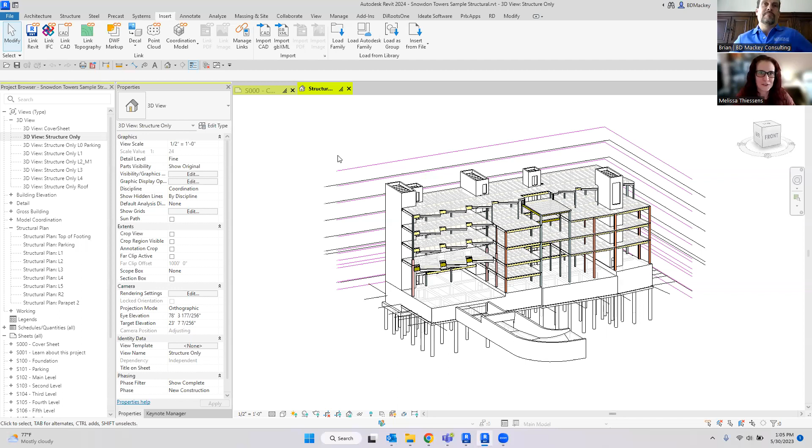And then I realized a big gust of wind came up and it was all the pollen. I'm like, oh no, wait, that's yellow, not white. That's just pollen blowing and it literally just covered the car as we drove through it. I'm like, glad I don't have these. I'm feeling like I'm going to use all of my N95s just to go get the mail and go outside because it's so bad. Yay.

Tom was asking why some of your levels are purple. And I did see that.

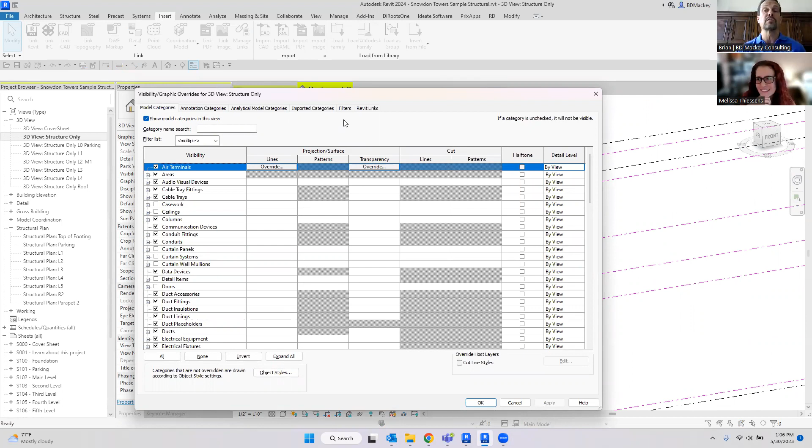So for me, if I go into the visibility graphics, and I do this often in the structural side of things, or even in the architectural side of things for the structural links, I basically start using filters for this stuff. So this particular filter is going to be the ones that says levels. I have levels that are building levels and levels that are structural levels.

So if I really wanted to go change the structural levels to be something else like green, we could add that in here too, so we can have pink and green. That's looking at the properties of those levels. So for me as the structural engineer, see, and I forgot to pull this one out wide, I should have done that earlier, and I would realize I was a slack ass.

But in the properties of a level, you do have: is this a building story or is this structural? Honest truth, I really do not know how Revit uses these behind the scenes. I use them quite often for filtering purposes or for scheduling purposes or things like that.

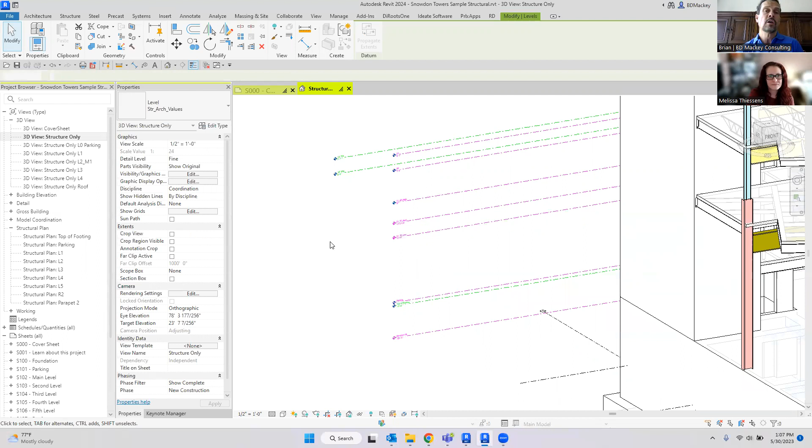So for me, when the architect says, hey, here's my level one, here's my level two, here's my level three, that's cool. But often for me, and this is kind of rotated weird with those being long, what you can actually see is there's the level that the architect put in there. Then I have my top of steel level.

And I know some firms love this idea. Other firms can't stand this idea. I know Desiree and she hates this idea. She just does the architect's level and puts offsets in. So whatever you're going to do, that's fine. But for me, I like a level in here. So I added this level. So therefore, all the steel can be at that L2 TOS rather than the architect's level.

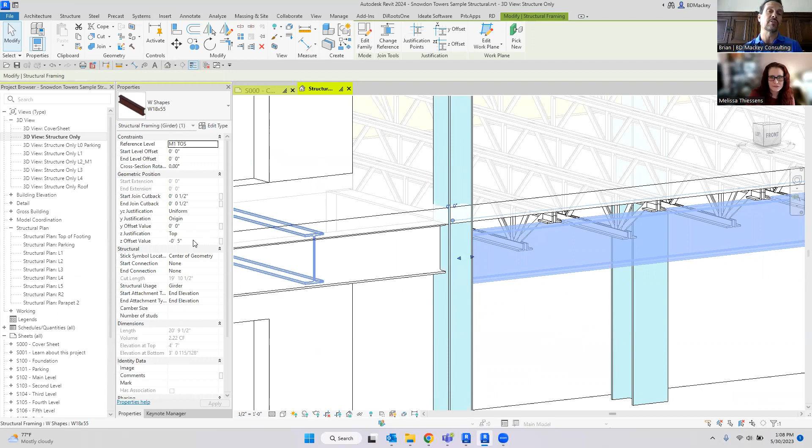Because especially on something like this beam, I don't want to have to take into consideration the thickness of the slab as well as the thickness of the joist to then move this down. I just know I've got a joist in here that's got a 5-inch seat depth. I want to put that 5-inch value in there. I don't have to say, oh, it's a 5-inch seat depth, and then there's a 5-inch or 6-inch or whatever thick slab, so I need to move this stuff all down.

So my floors are always set up to the building story, and my steel is always set up to the top of steel. That's how I model it structurally. I sometimes do the same thing in architectural files as well, especially when people start adding mezzanine levels or parapet levels or things like that.

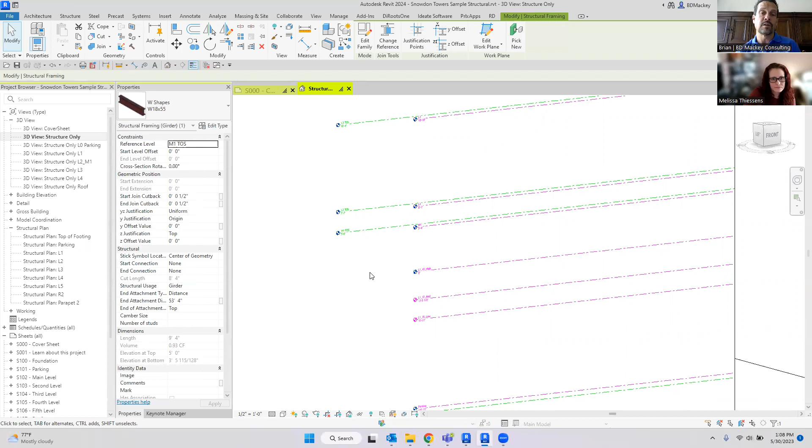I will go in and start unchecking that it's a building story. So again, I can start filtering out the parapet levels or any other crazy level that the team thinks they need in there. So that's why there are some magenta, purple, pink, whatever you want to call them, levels, and that's why the other ones are black. And if anybody truly knows why you have building story and structural, I've never actually seen how this affects anything else before.

But I'm going to add something on this. This is going to be more for the architects and the structural engineers.

The other thing about levels that I see that's often overlooked, and if you guys can't tell, I'm buying time for you guys to submit more questions. So this is me buying time.

But when you look at a level, there is a value for a level called computational height. And what that actually means is when we are taking rooms and/or spaces and calculating the square footage of that room or space, at what height do we do this? Normally, this isn't going to really affect you unless you start getting into canted walls.

So if I've got walls that are canting and I go in and start changing this computational height, it will go through and start changing where it's being calculated from. My personal opinion, leaving this at 0 is a horrible idea. And the reason why I say this for architects is if anybody comes in and models like a finished floor or a ceiling as a floor or something that's at that 0 height level, and you have room bounding checked for that element, it could really start to screw up all of your rooms.

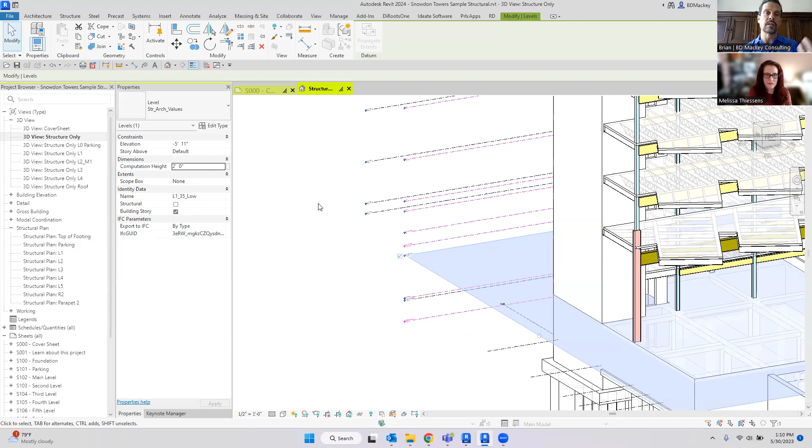So for the architects or even the MEP engineers in the room, I almost never have my computational height at 0. I go ahead and move it up to like 2 feet or something. Because if I do that, then it's going to calculate the value at 2 feet, not if I put a finished floor and worry about it there. Again, if you're in an all plumb building with walls, then this really isn't going to affect anything except for possibly keeping you okay with not screwing up your floor plan or your room spaces, etc.

So I'm going to go into a floor plan, just as an example as I'm still buying time for more questions, and I'm going to throw a section in here. I'm going to go to that view. Oh, actually, I forgot to put a room in there first. I'm going to come in here and place a room. No, I don't need a room tag.

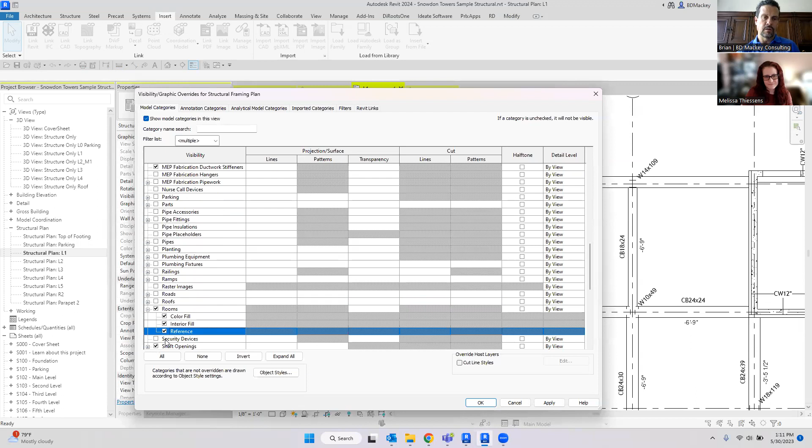Oh, sure, I'll go manage my view template and just turn rooms on in here because I forgot I had these turned off for the linked files. Probably should have gone to a working view, but that's okay. I'm going to turn my rooms on, and turn on the X and the color fill. Okay. I'm going to put my room in here. All right, so these other rooms you're seeing are the rooms from the link file, but I've now got a room in here and I've got this section.

The one thing that I'll also point out is if I come in here and select this room, I did this one at level 1, that's where its base is. So I'm going to change the computational height to 4 feet on this. I'm going to go back and select that room. Do you see this dashed line that appears when that room is selected? That dashed line is a virtual representation of that calculation point. So if I select it right now, you can see it's about 4 feet above the ground. If I go back and select my level and change that down to 2 feet, then reselect my room, you'll see that it has now moved down.

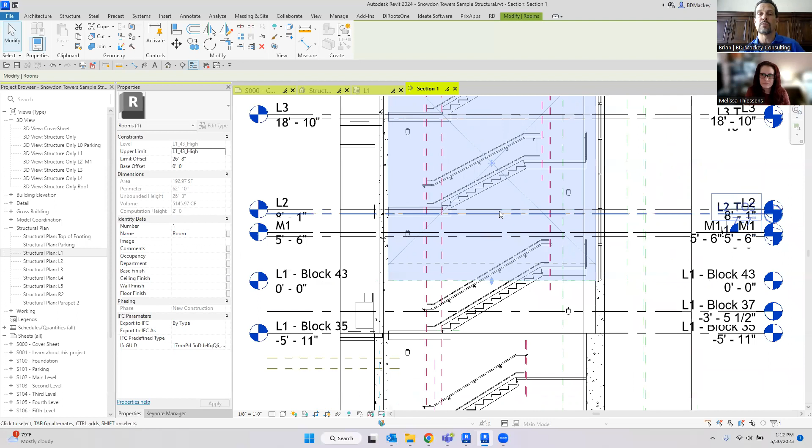So if you ever select a room and notice there's a dashed line and think, what is this? I can't select it. What was that line there? That is the computational height. So if you are in a section or an elevation and you select a room, you can easily see, according to the level you're on, what that computational height is set to. So that's one of those big things I always like to point out for the architects and engineers in the room. Change that computational height for the levels from 0 to at least 1 foot or something like that.

Cool. Nick also made a comment back when I was talking about the top of steel levels: if your slab thickness changes and you're like, oh man, I went from a 5-inch thick slab to a 10-inch thick slab, that's a bit exaggerated, you can just move the TOS levels down. Yeah, that is the other reason why I do it. So if my slab thickness changes, I don't have to go grab the properties of all of my members and add 6 inches or 4 inches or whatever that value is. I just move the TOS level down with it. So, yep. Thanks for bringing that up, Nick. That's the other reason why I do it. I just forgot to mention it.

Do you ever tie that to a global parameter?

The height of the level or the computational height? Well, either, I guess. Height of the level you can't add to a global parameter, unfortunately, without using dimensions. You could tie them all in with dimensions, and I have done that before. So on a typical high rise, I might do a dimension from one level to the next level. And then in that dimension, I can add a global parameter for typical floor to floor height. And then if I change that, they all move.

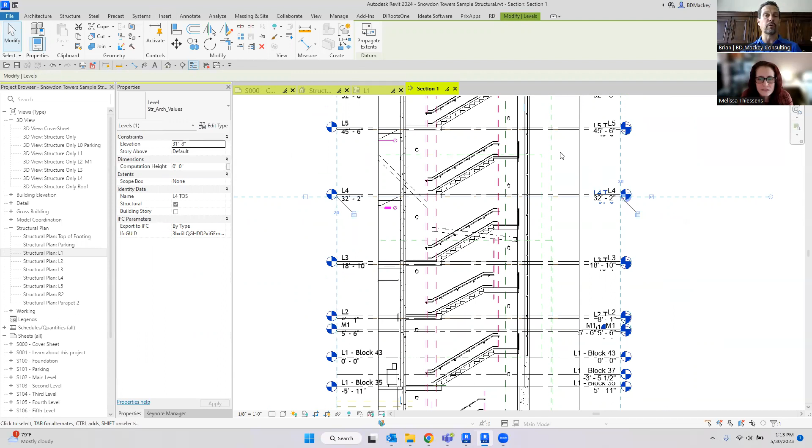Sounds really cool. And on sample projects that are pretty small and simple, it works great. On a real project, you do that, then it takes 4 hours because everything's blowing up and you move a level anyway. So personally, I prefer to move the levels one at a time to start seeing, oh, hey, this blew up these few things. So that kind of gets into that. But that was my add in to the levels from whoever originally asked it.

I think it was Rick. It was all about color. I like it. All about color.

One thing I was noticing though, if you pick a level again, under the constraints, there's the story above. Yep. Does that go into things that are building story? So if you have level 1 and level 2, but you have like 6 levels in between, does that only show your building stories? Correct. Yeah, the story above only shows building stories. So you'll see in here, I'm not seeing any of the ones that say TOS.

And then I believe the story above is the next logical story above that it takes into consideration. I remember I dug deep into this, like, okay, cool, I have a story above, but what does that mean to me? And then I can't remember what my solution was. Sure. Well, that was my questioning way of answering. That's one thing that Revit does with the building story. Okay, great. Then what does story above give you? I would love to think that would also work.

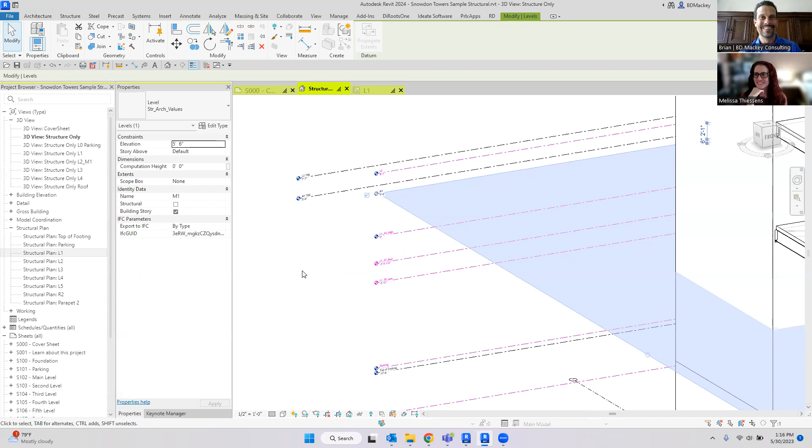Yeah, the pop-up said something about IFC, which we all definitely use a lot here. Oh, well, that makes sense. I was gonna say it might have been used in exporting out to the old analytical models for engineers too, but I'm not really sure. Yeah, so there you go. If you're non-American, you might be using that because everybody but America uses IFC. Right. So maybe non-Americans could tell me more.

Cool. So I see some other questions in there. Let's see, we'll stick with the structural bit. So Ben's asking, when working with wood projects, is it better to structurally model the architectural walls that we need as shear or bearing walls, or just use their walls and use text to label them? There's actually two ways you can do this. You can model the shear wall.

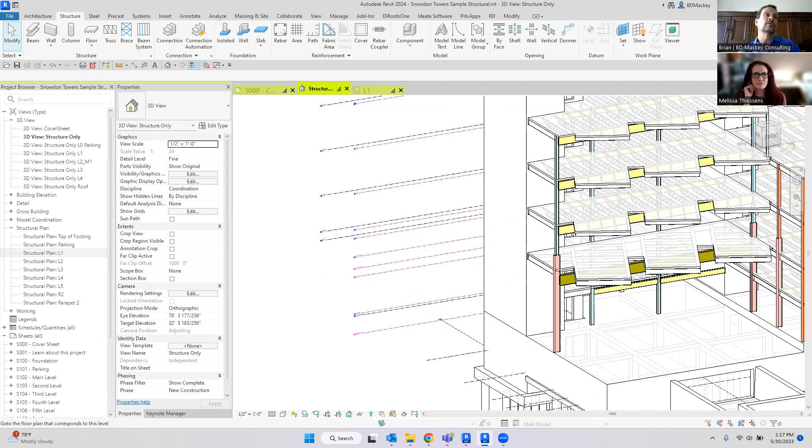So I'm gonna go back here. I think level 1 doesn't have architecture on, except for the rooms. So I'm gonna go back to my level 2, which should have the architectural stuff turned on. So when you come in here and you start looking at those links through the architectural file, let me find an actual wall.

If you wanted to get this coming in here and you wanted to model the architect's walls, one thing that you can do is you can model right over the top, like you said, so you can label and tag them the way you want. This is another thing, and it depends on the size of the project, that you can do.

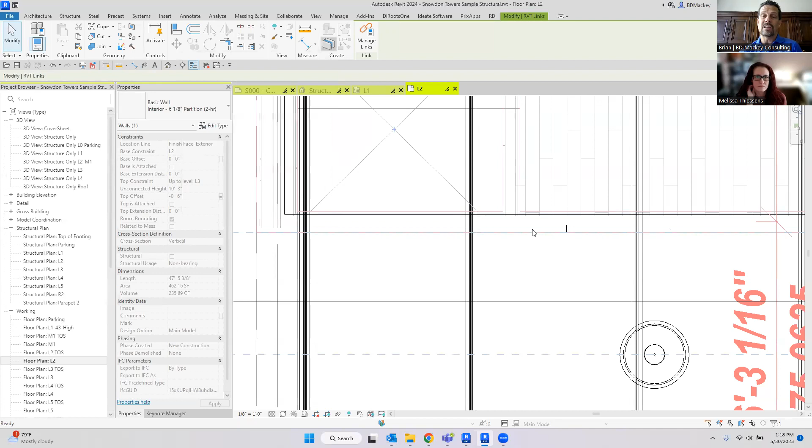But you'll notice that if I tab select and get the architectural wall, what I can actually do is come in here and start creating parts. So I can take that architectural wall and generate parts for it. So now I have every single layer of that architectural wall put inside of here. So if you're like this wall shear, that wall shear, that wall shear, and I'm just going to go ahead and isolate these real quick, but not the architectural file.

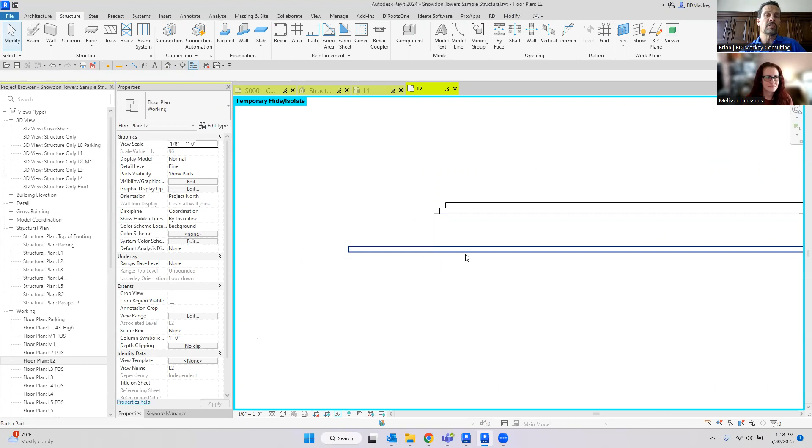But so you can see I've now generated parts from the architectural wall. And the cool part about this is, and I grabbed one that had a door in it. So you'll see that even though I grabbed this part, it automatically picked up on the opening from the architect's where the architect had the door. It didn't put the door in for me. It didn't put my opening in there if you want the opening family, but it did go ahead and break this down as a single wall.

And if the architect moves their door, of course, it'll move the opening. If they delete the door and put a new one in, you're screwed. Then all of a sudden, actually, no, as a part, it would still pick up on that. So that's the other nice thing about parts.

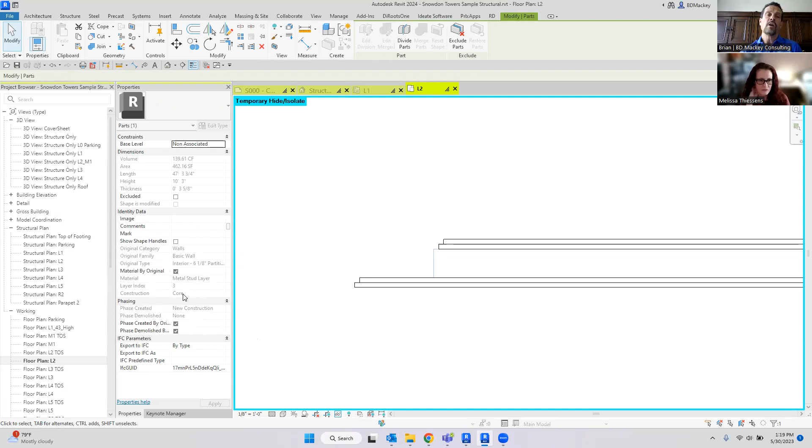But if you really just wanted to start showing like the stud layer, or you want to show this layer, notice that once I've done this, this is all in the properties and picked up, said, hey, this originally came from a wall. Its family was a basic wall, and it came from this original wall type. And it's even got the material by original. It's got a metal stud layer, and it knows that this was the core construction, right? All of the properties of the wall still come across here.

So if you're like, man, I wanted to pull their stuff out, but I only need to see the core, then what you can also do is go into a filter, and I'm going to go filter out parts. I'm going to go say create a new filter. Parts, non-core. And you will notice that I did select the part before I went up to the filter. And the only reason why I do that is then when I hit new filter, it automatically selects the category for me. So just an FYI, that's what I always do for filters. Plus, that way I can then see the properties and remember what I'm trying to do for my rules in my filter because I always forget.

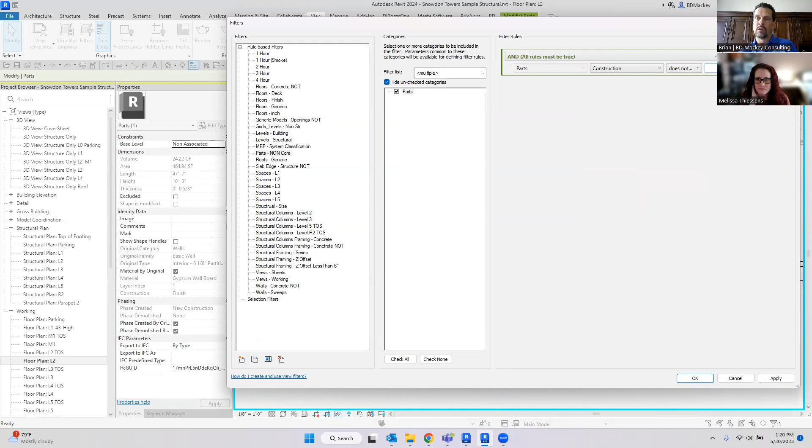So now you can see it's got parts. So I've got parts selected. I can say parts. And what you can see in here is now you can start seeing all of the original stuff that's inside of here. The original type, the original family, the original category. And I should be able to inside of here see what was the construction, right? So the construction does not equal finish. And I can say, okay, all right?

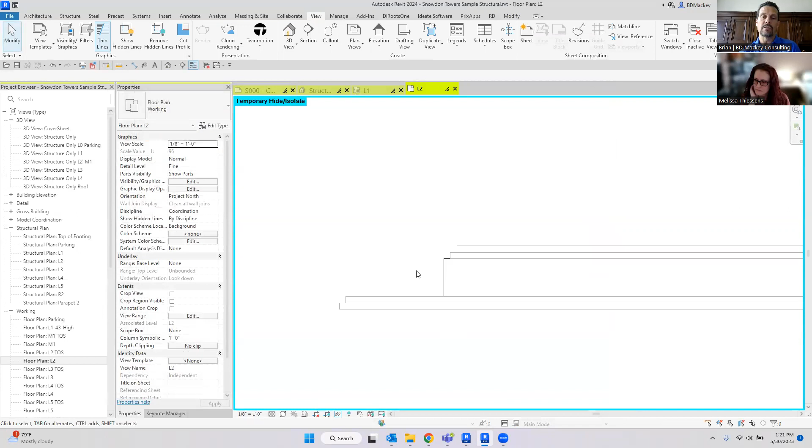So then in my view, I can go back and add that parts filter, and you can break it down to finish 1, finish 2, all the different things that you're looking for. And now I can turn those off, or I'm just gonna halftone those just so we can still see what's going on. And now you can see I've got my core layer, but not all of the rest of the other parts inside of there, right? I'm going to even go in and maybe not just make those invisible. I'm going to go ahead and change the line weight to a thinner line weight.

Which did not work. So I'm just gonna ask a question on your filter. Is there a reason you set up your rule to say does not equal? Because normally for a structural engineer, they're going to want to see the core stuff, not the finishes.

Right, but when you part an architectural wall, you're going to get all of the finishes. So instead of doesn't equal finish, would you say equals core? Well, yeah, but it could be finish, it could be substrate. Equals core. Yeah, I mean, I could have left substrate too, but I don't know.

Honest truth, in Revit prior to 2023, when people were like, I only want to see the core layers of the walls. If you guys did not know that, in 23, under your walls, they added the category for non-core layers. So in 23, you can turn off the non-core layers only to see the core.

But prior to Revit 23, what I would actually start showing people is, hey, let's go ahead and part it. Now you can see just this. That's a pain because you've literally got to select every single wall and part it. But if you do that and you have a view set up only to show the parts, not the original, then you can go through and do it.

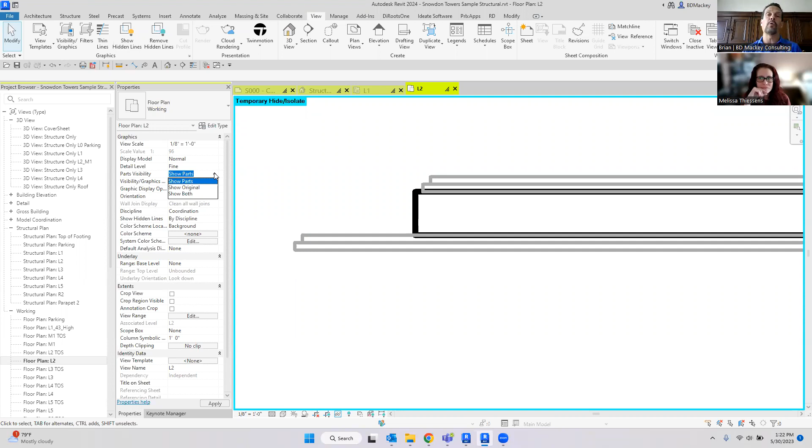So for the structural engineers, like, man, I only need 3 or 4 of the architect's walls that are going to be my shear walls. Now you can do this. Now you're only seeing those parts that you're just determining as shear. You can still come in here and add marks or comments to this. So if you needed to add additional information, you could go ahead and do that as well.

Downside to parts is if you part a floor or a ceiling or a foundation or a column, everything in Revit that's been parted is a part. So they are all going to have the exact same line weight. I added a filter for this one, but you can see the original filter, it's not there. If I go part the floor, it's going to have the same line weight. It's going to abide by the same rules as all of the other parts.

So if you're really getting into parts, you've got to go start creating a crap ton of filters for all the different options for a part to change the line weights or to turn the visibility on or off individually.

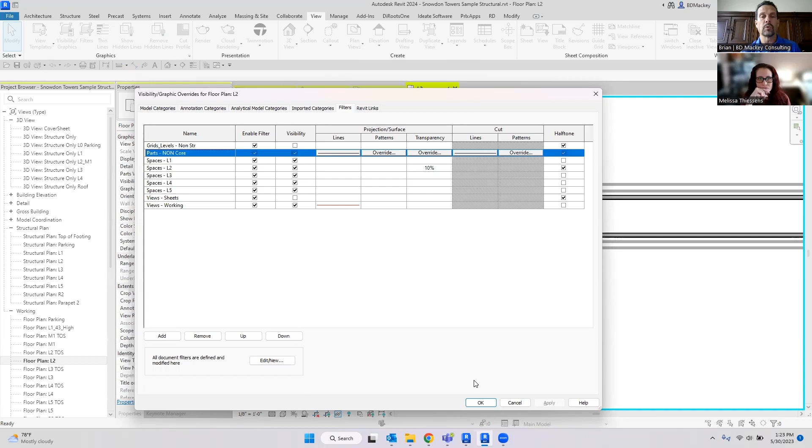The other fun part is now that I've parted this, I can actually get rid of the material by original. So maybe you've got a wall shear material for shear walls, whatever. I'm going to come in here and switch it to that material. And now I have this one representing whatever that material is. So if you have a hatch pattern in that material, you could swap it out to be your material.

Again, it gets to be a little bit of a pain if you've got hundreds of these walls, but this is what I tell a lot of my structural engineers to do on wood multifamily or wood residential. Just part out the architect's walls and be done with it.

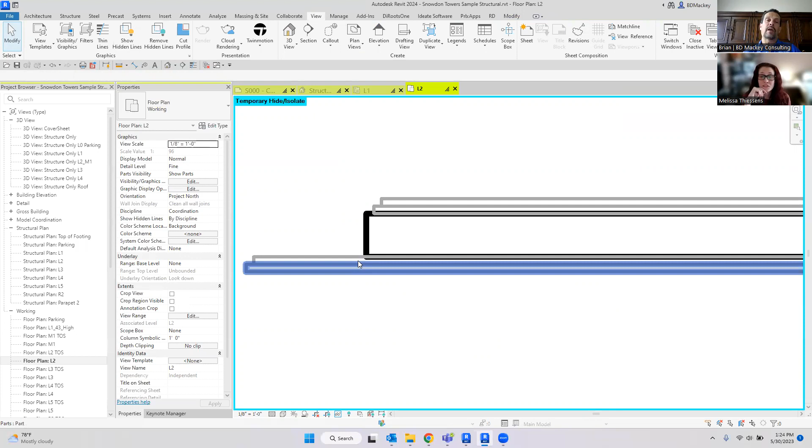So does it basically copy monitor their wall? In my mind, it's better than a copy monitor because now I have the capability to turn things on and off and it still maintains the origin and it just updates. I don't get the stupid coordination monitor alert, blah, blah, blah. It just does it. That is better.

If I'm working in a project that's going to be precast or tilt-up and the architect is modeling concrete, Desiree actually did an entire project like this when parts first came out, probably back in 2016, on a small building. She selected every single one of the architect's walls and said create parts. They were all concrete. She used a filter to turn off everything that wasn't part of the core. And then if they moved the door, it all updated.

I've now got this part. Let me go back to 3D here. I'm going to select the parts first and go to my 3D. So she even went in and started editing the parts. You can actually merge and unmerge parts. So she started doing some of that stuff. I'm going to go to sunglasses and isolate. Oops, that's not sunglasses. It's previous.

Isolate elements. Come up here to say, do part visibility, just show me parts. Right, so she even came in, then all those parts were there. She's like, ooh, I need to grab this part. I need to divide that part because then I needed to put a concrete seam here. So she edited the sketch and she's like, cool, let me put a seam right there and then finish.

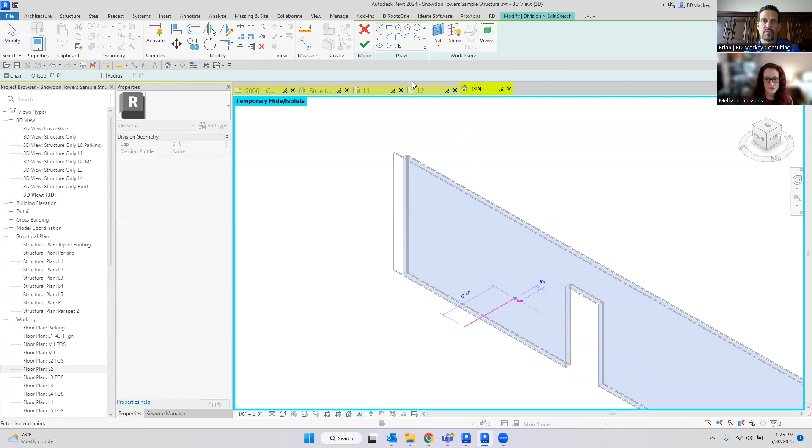And then she was able to, nothing will be divided. I broke something there, but she was able to go through and then start playing with all the different parts in the divisions to break it up into the pieces she would need for precast. And again, when the architect moved the door, it all just kind of updated and it worked pretty well. Not a huge project, again, more of a smaller type project.

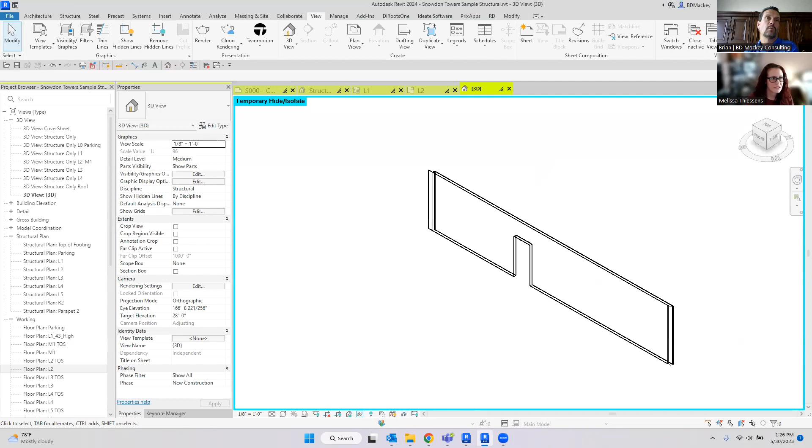So hopefully that kind of answers the question of wood projects. The other thing that I have done too is I've actually created an adaptive component for one of my clients. Like, I don't want to go through any of that headache. That all seems a pain, copy monitor this. I just basically need a tag that says this wall is shear. So we actually created an adaptive component that had like a nested tag into it.

So we would click this endpoint of the architect's wall, click this endpoint of the architect's wall, and it was just an adaptive component with symbolic lines on it that would move with it. And so if they moved the wall or whatever, it would go, and then they just had manual values they would type in for what type of shear wall it was. So they weren't actually doing any modeling. They were just adaptive componenting with symbols to go through that architect's file, and boom, there they go.

I've seen other people do it with just like a line-based detail component. So they just draw a line next to the wall. It's got values that they can type in. It looks like a tag, and they go through and do that as well. So there's a few different options. I'm personally a fan of, I like to model it. So I would either do parts or truly just go model a wall. So Ben, hopefully that answers the question.

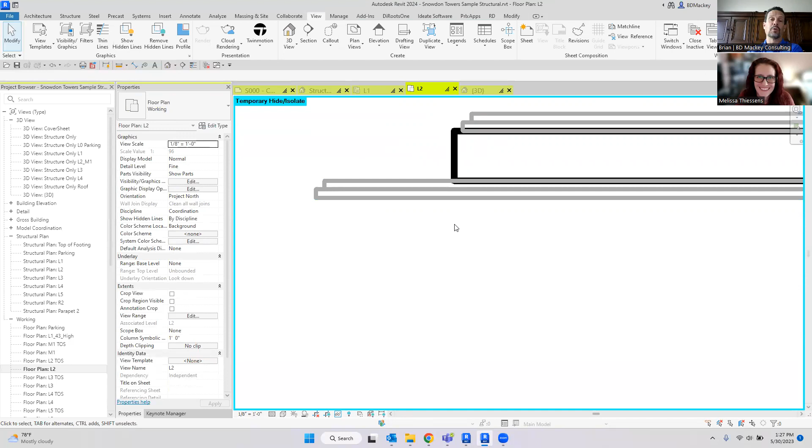Say, I didn't know that if you did parts on that, that it would keep updating. That's kind of awesome. Yeah, the parts through links are actually kind of cool. I had one client, I would show you the project, but I can't because it was a government project, which is so stupid. It's a top secret project that you can see off the road, but it was the new air traffic control tower for the Pentagon, which is a fire station / air traffic control tower.

But it had all these bumps in and out to the concrete. It was all different thicknesses. It was all going to be cast in place or precast, I can't remember. And so literally the architect themselves just kept doing the parts. Because the other thing about it is you can take the part, you can divide it, but you can also say, show me the shape handles. And so he was dividing parts and doing shape handles, like, oh, this one part needs to be thicker, and over here it needs to be thinner. So he was going through, like, cool, let me do that.

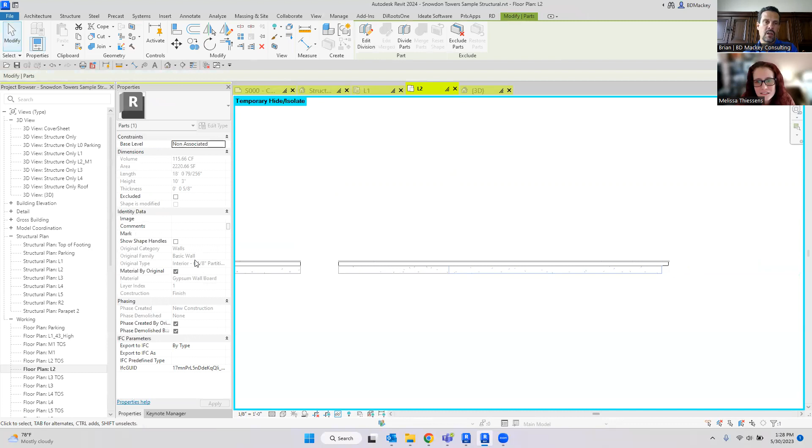And let me divide this part. And let me go edit the sketch. And let me draw a line from here to here. And let me finish that. And now he's got that division, right? So we finished that division. Then you take this one and be like, okay, let me show the shape handles on this one. And then this one was thinner.

And so literally just with one wall, he did all of this, and he just made sure all of his views were just set to show parts, except for a couple working views when he manipulated the walls. And so that's what he went through and did on the entire project. And then even places where, oh, there was an opening here and we needed to merge it. He split this part here and then merged these two parts so the concrete would wrap around the studs or the insulation or whatever it was.

And his entire building was done with parts. Small project, only 1 or 2 guys working on it. It was beautiful to work with. Large project, large team, yeah, you're going to get somebody who doesn't understand parts and you're going to be hosed.

So. Trying to think of a more family-friendly way to say I want to play with parts more. Melissa, do you want to play with my parts, Melissa? Is that what you're trying to say? No, I want to play with my parts. Wow.

Hey, whatever. Once you get done playing with parts, make sure you publish the package so someone else can consume your package. Someone can consume it. Yeah.

Oh, I love Autodesk and the way they don't think things through. And make sure to wash your hands afterward. Nice, Rick.

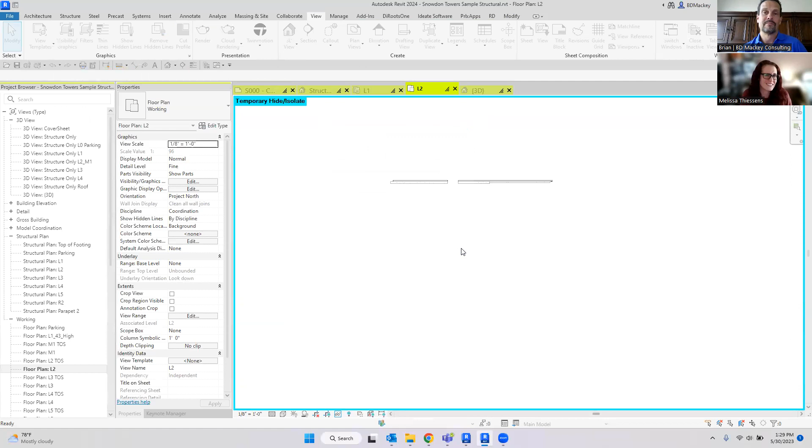All right, so what other questions do we have? Well, I feel like that kind of dovetails into Simon asking if you know any undocumented features in Revit that everyone should know. So maybe they did document it and I didn't look into the parts documentation because you don't want to Google that.

How do I play with my parts? I don't know. Let's Google that one right now. The best use for your part, yeah. No.

The biggest undocumented feature that I show, and I laugh because I was at a BILT session, I think it was back when it was still RTC, and I was giving a presentation. It'd been a while since I'd been in my data set, and I'm like, crap, wait, what did I dimension here? So I right-clicked on the padlock, and I do this all the time, and I hit Show Related. I'm like, okay, it's dimensioning between grid D and grid C, right?

I don't remember what it was. It was in a family or something. And I'm like, okay, close it. I just did that real quick for an explanation. And somebody's like, whoa, hold on, back up. What did you just do? And I showed that, and everybody's like, oh my God. I got like 75 tweets for that little tip. Nothing about my entire session.

So as those of you who know me well know, when I'm in a boring meeting, I will right click on everything. And in Revit, there's a lot of things where you can right click and get a toggle. Cool, I can toggle it by clicking it; the right click is stupid on that. But if you right click on this padlock below a dimension, you can say Show Related. And when you do that, it's going to open up this little dialog. It is a non-stretchable dialog box.

I've been yelling at Autodesk for years, but they're like, yeah, nobody uses that tool but you, Brian. I'm pretty sure on the little list of tools being used on the reports they get, I'm the only person who uses this. But it will then show you the two elements. It'll tell you up here in the description, and it will highlight those elements down on the screen.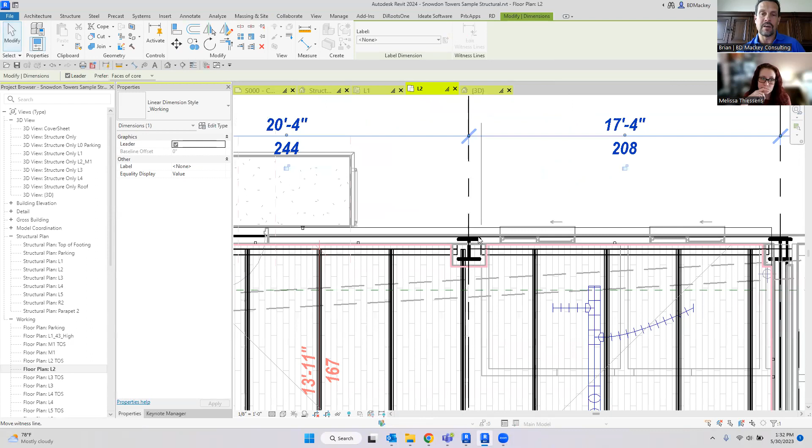Now, this is really stupid in this example, because I'm right on the grid lines. But like here, did I dimension the grid line or the column? You might not know what was dimensioned, right? If I take this up here and I go down here and get the column, you might not know. You can tell now because I've stretched it out. But if this is back where I had it, is that dimensioning the grid line or the column?

So again, right-clicking on Show Related will then say, oh, no, you did the W column something, something, something. Again, non-stretchable dialog box, and grid 8. So it will show you and highlight the things you have dimensioned. And I use this tool not only in projects, but quite often in my family environment. It's like, why isn't this family behaving? Oh, there's two reference planes on top of each other. It's grabbing the reference plane called Front, not the reference plane called Panel Front.

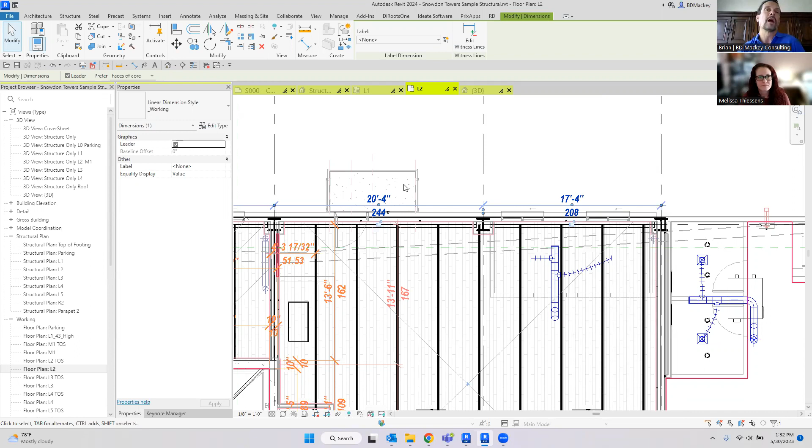And I can just toggle through those and start seeing what's going on. So that to me is an undocumented, I don't know if that's necessarily a feature, but it's definitely one of the undocumented tools that I don't think a lot of people know that you can do. So for me, it's a ton of right-clicking on whatever you do.

Another one, and I learned this, God, my kid is now 26, and I think she taught me this when she was 13.

So about 13 years ago, I learned this one, that if you have a wall or a grid, I've just done it with a grid line, and you come in here and you grab the little grip, right? I see everybody all the time, they need to get that grip, so they zoom way the heck in. And then they go try to move it, but they've also got to pan. So they're doing the claw with their finger, trying to pan and zoom and do all of this with their little finger.

If you take that grip off the screen and release it, so I'm gonna do this again, grab the grip, drag it up. Oh, it must be pinned. I'm gonna unpin it first. I'm gonna drag this grip up here, and it's dragging. If I drag it off the screen, notice how I don't have my finger on the mouse, and yet I can move the mouse and it's still going. So you can then zoom in and out. It's still trying to move that grid. You can pan, you can do whatever you want, and then you click the mouse to adjust where it's going.

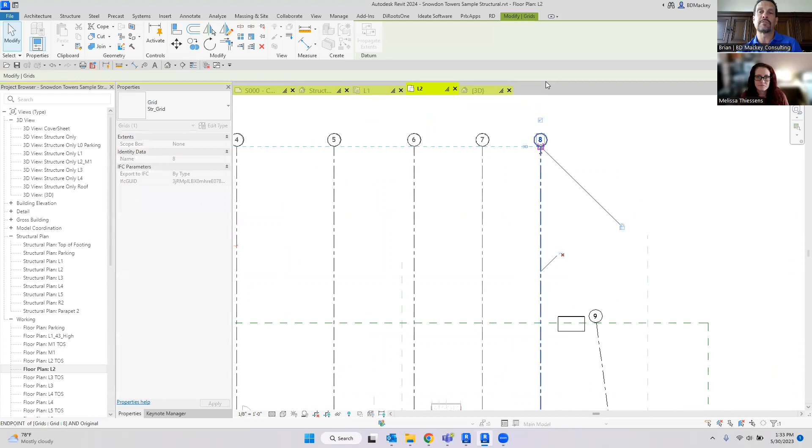So if you take any moving grip, walls, grids, levels, anything where it's line based, you've got a grip to stretch something, and you take that grip, drag it off the screen, release the button, move your mouse all around and drag it. Theoretically, you could also do the same thing by right-clicking on it and saying drag in. That will give you the same option. Handy. So yeah, I call it the non-claw maneuver.

Couple other things on the right clicks that I always like to do. If you really want to screw somebody up, you could say maximize the 3D extents on grids and levels. I don't ever recommend doing this because it does go to the 3D extents. So if you have an AutoCAD file in here that's got an actual state plane coordinate system, you maximize extents, it'll go way out to where that AutoCAD's extents are. So do be careful of the maximize extents.

But the one I do like often is the reset to 3D extents, right? Because if I turn my crop region on, and then I take that crop region and move it down here, these grids are no longer 3D. These grids are all 2D and they've been adjusted for the 2D extents, right? If I turn that crop region off and get rid of the visibility, it's still 2D and it's not reset back to its 3D extents. You can right click on it and say reset to 3D extents and it will go back.

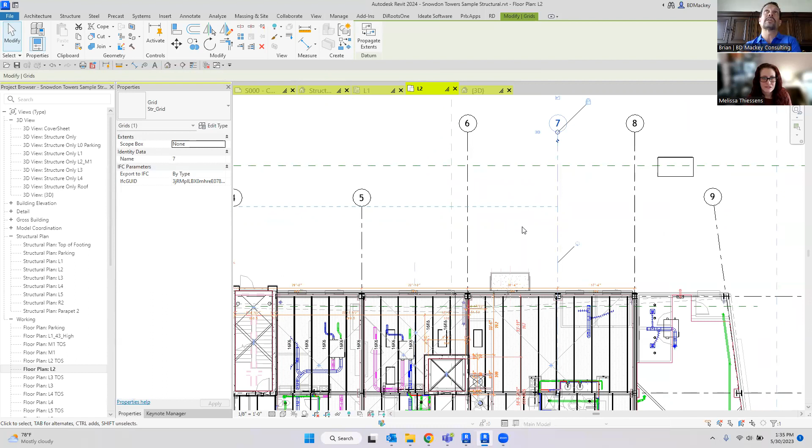Oh yeah, I only had one. I was gonna say, unfortunately, it will only let you do one at a time. So if I have two of them selected, the reset does not come up. But for whatever reason, I do not understand why Autodesk has, in most of the family templates, the levels all 2D in all the different views and half of the reference planes. So it's like they've taken the grips and moved them in half of the family templates when you go to create them. So yeah, right click, reset to 3D extents, really nice feature as well.

And I'm sure that's documented somewhere, but I've never seen people talking about that. So those are some of those little things that to me make the day-to-day productivity huge when you start going into it.

Like the other one that I don't think a lot of people know is you can say open, and in 24, or was this 23.1? I don't remember. In one of the newer versions, you can say, go open the sheet that it's on. So if you're at a view and you want to go see what it looks like on the sheet, in the project browser you can right click and say open sheet.

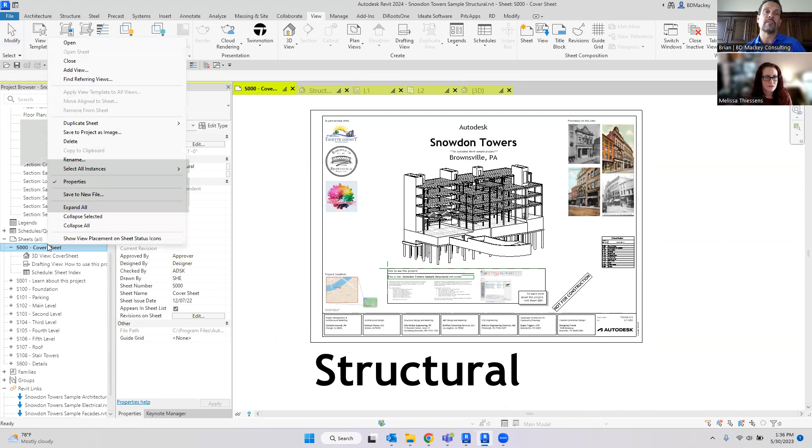Inversely, we've always been able to go down to the views you're in, or go to the sheet you're in, find the views here, and open the views this way by double clicking them. The open sheet has been something that's kind of new, and I really love that option when we start doing that.

The other huge tool that I use often is, this is my 3D view. I'm going to reset this. I'm going to go change my scale just a little bit. The scale doesn't actually matter here, but I'm just going to change it a little bit. So I'm going to come in here. I'm going to turn my section box on. I'm also going to go turn off all my links because I don't need to see all the links in this view.

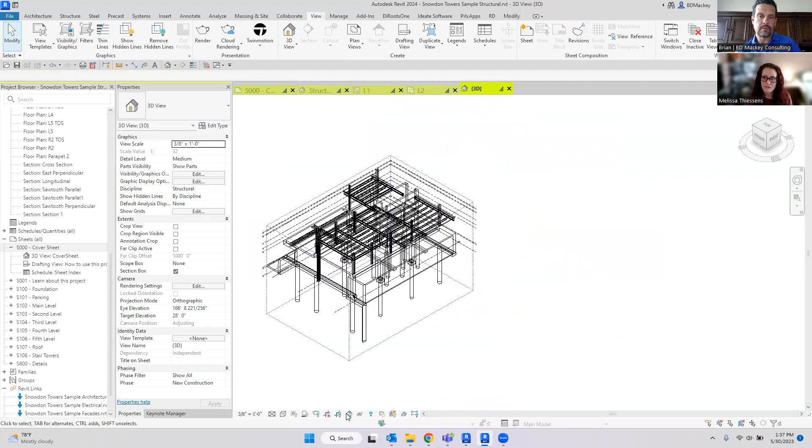And this is one that I have people do for me quite often. I'm going to stretch this section box down. Sure, that looks great. I'm going to turn off my scope boxes, which you don't have to do. I'm just trying to clean this up a little bit. All right, so I've cut my file down quite a bit. I'm going to go create a new sheet. Probably shouldn't have been an 8.5 by 11 title block. So I've got my new sheet here.

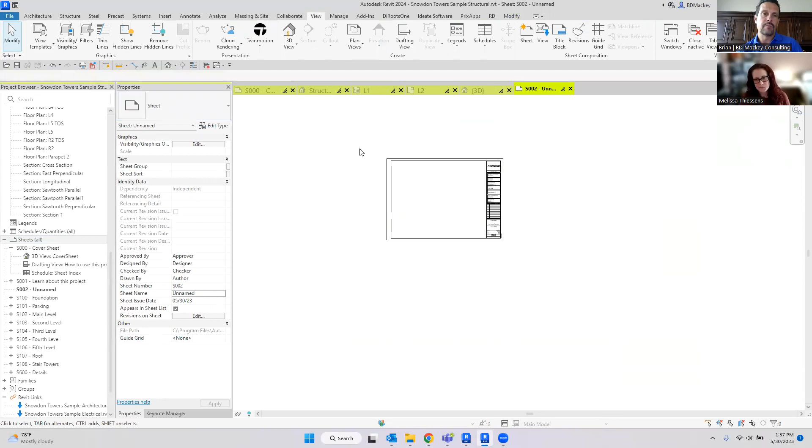I am then going to take that 3D view that I've just cut down the way I want to, and I'm going to put it on the sheet. I don't care how big it is. I don't really care what the scale is. Because I get people often saying, hey, can you help us troubleshoot this stair? And I'm always like, cool, can you just send me that stair? Because I don't want to go download and open up your 1 gig file. I just need to focus on the area you're in.

So if you do this, you have to put the view onto the sheet. I don't know why. I think this part's stupid. But you can then take that sheet, right click, and say, where is it? That's not the one I wanted. Save to file. There. Save to new file. So I can come down here and say, cool, go save this to a new file.

What it's going to do is save just the elements you have inside of this view turned on. I guess I should have checked do not show. I thought it would only give that to me once. I didn't realize I was going to need it 12 times. It's going to save the elements that are visible in this view and only export out the elements visible in this view.

Now, it's not going to cut these beams. It's not going to cut this floor, but it's only going to give me those beams to the extent. It's not going to give me the columns on the other side of those beams, or all of the floors above or below, but it is going to give me this entire floor for the length of that building. But this does help me often.

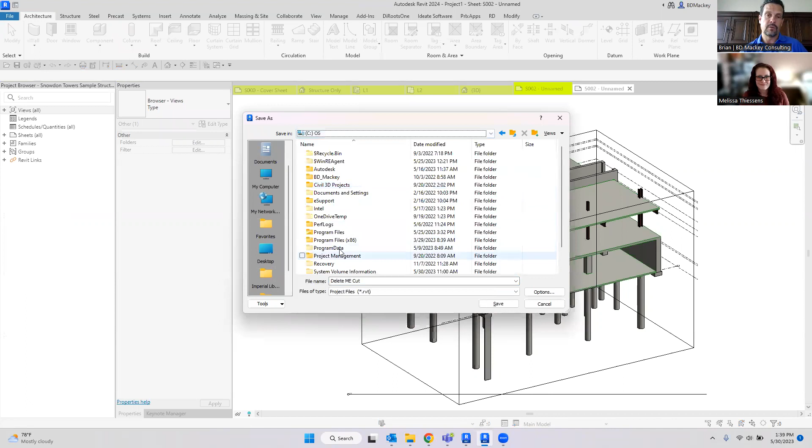Delete me, cut. I'm going to put this in my temp folder. Actually, open the temp folder before I save it there. All right, it even opens the file temporarily. I wish it would just keep it open. That's the reason why I did it. But now if I go open that file, I wonder, is it in your recents? Because it actually technically opened it. No, I just had to check.

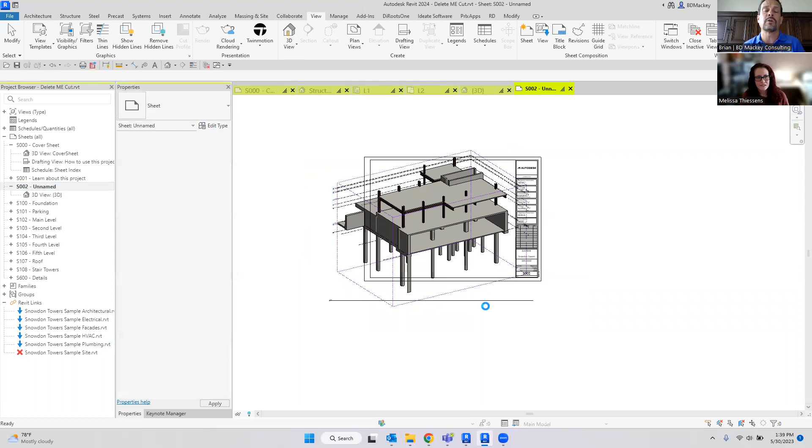So I'm gonna go ahead and open the file. I'm gonna go to my folder again. I'm gonna grab that delete me cut and open it. So quite often I get people like, oh, I just need to look at this part of the building, or I just need to export this part of the building to Rhino or to SketchUp or whatever.

Now it comes in here, you'll see there's not a whole lot in here. I got my 3D views, and it cracks me up. If you do it from the default 3D view, you then end up with 2 default 3D views. But I can come in here, open the 3D view because technically it's in the sheet. Is it the right 3D view I'm opening? Who knows?

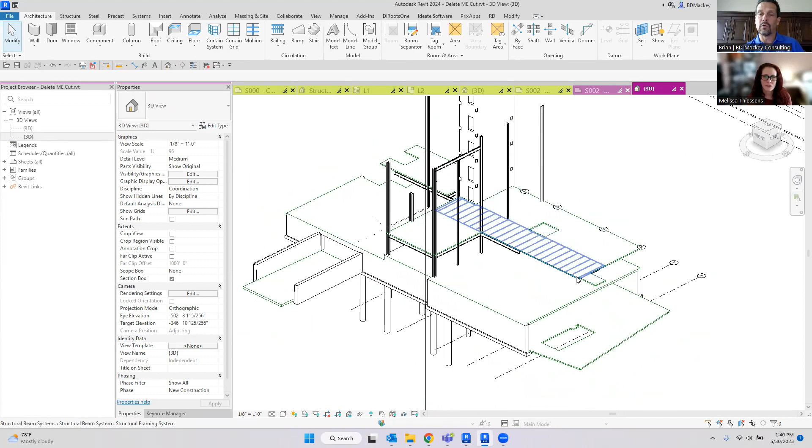We'll rotate this around. Oh, it did give me all the links too. I wasn't expecting that. I don't know if it's done that in the past. Probably should go unload those links, but what you can see is now it did give me, like I said, only that part of the building. So it did give me the entire length of the floor. It did give me the entire beam system, right?

But it didn't give me the column on the other end of this beam because I was cutting through the middle of this, right? So it only gave me parts that I was right there looking at. Again, like I said, it's not perfect. It's not going to split your column or your walls, give me the walls all the way up the building. It's not going to split your floors, but it does only give you that stuff you need.

So if you're ever in part of a building, hey, I just need to export this, I just need to do this, what can we do there? That's what I always tell people. Put a section box in. I guess it brings links along for the ride. That's new to me. I don't recall it doing that. Maybe it has, and I've just always removed them. I don't remember. But it does just then go in and bring those parts of the building.

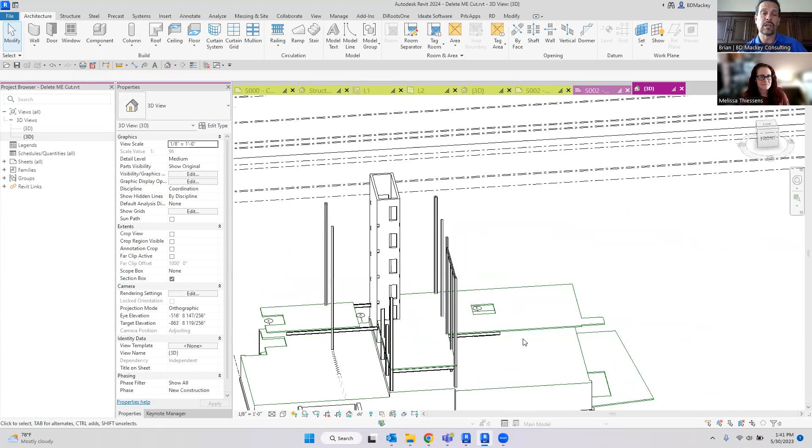And I use this especially when I'm trying to work with my clients. I'm like, hey, give me just part of the building I need to see. That, in my mind, is the easiest way to get it to do that. So hopefully that answers the question Rick had for undocumented features.

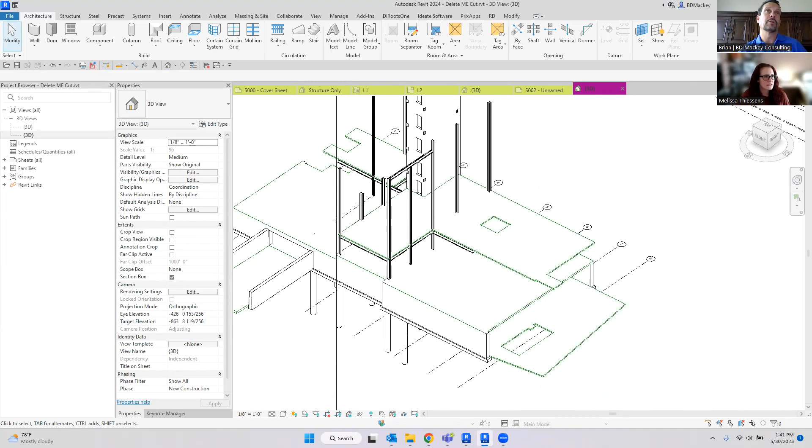I think it was Rick. No, it was Simon. And both of their icons are purple. I thought it was the same guy.

So hopefully that answers the question of a few of the undocumented features that I like to use. So what else we got up there? Keeping with features, are there any 2024 new features that you've worked with more that are more or less than what you had hoped for?

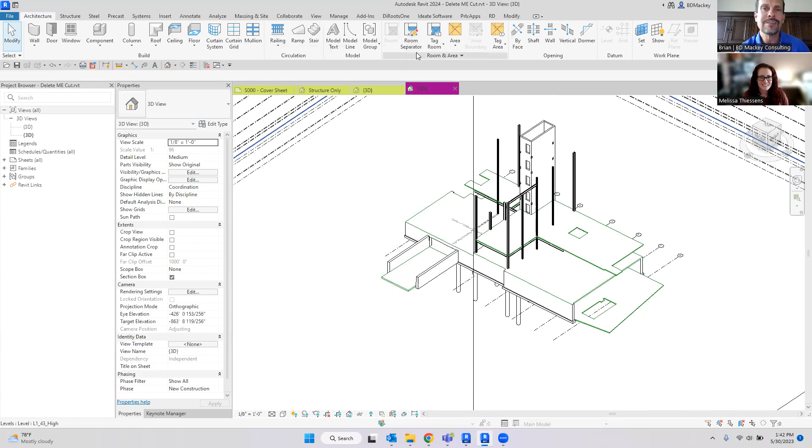I haven't done a whole lot in 2024 yet. I have one client who's using it. I'm still trying to get used to the damn icons. The icons for me, I'm still like, where's that button? I'm staring at the button. That's not what it used to look like. My muscle memory's there. My mouse and my finger go there. Well, my brain has to read, is that the right tool? Dumbfounding to me. I haven't played with this a lot.

I have been playing a little bit with the topo solids with my one client who's working on it currently, and we've been noticing a lot of issues on the topo solids only because it's just kind of weird. He's trying to do phasing and get the cut and fill, and we keep running into a couple weird nuances. It's still cool. He's still loving it better than the old topo surfaces, but just trying to still get in there. So I haven't used a ton of the new 2024 features yet, so I can't really answer that question.

I have noticed in files that I've just been playing with the speed performance, which is always my biggest reason to tell people to upgrade. I have noticed the speed is different. It is faster in 24 than what I'm getting in 23, but I haven't really jumped into any of the 24 stuff to be like, oh yeah, this is the coolest thing ever. There was something I was creating in a family the other day and I can't remember what it was. I'm like, oh, this is new to 24. And I liked it, but I don't remember what that was.

So sorry, Rick, can't really get into the 24 features yet. Trying to get up to speed on some of that stuff and really get into it and start playing a little bit more. And theoretically I should be doing more of that this week when I write my build paper, but we'll see. Yeah, you should.

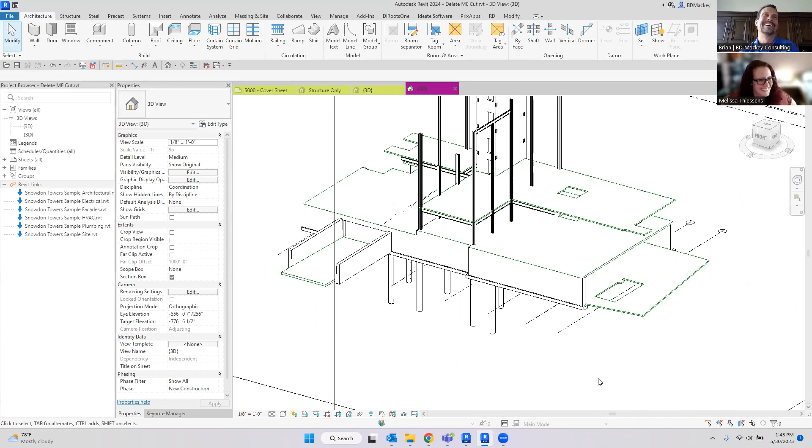Let's go. Ben has some more questions on parts. So when you use parts, does it update when the architecture moves or changes the wall type? And the answer to that is absolutely yes. I didn't want to go to the cover sheet. If they change the wall type, the definition of, yeah, so the parts still understand.

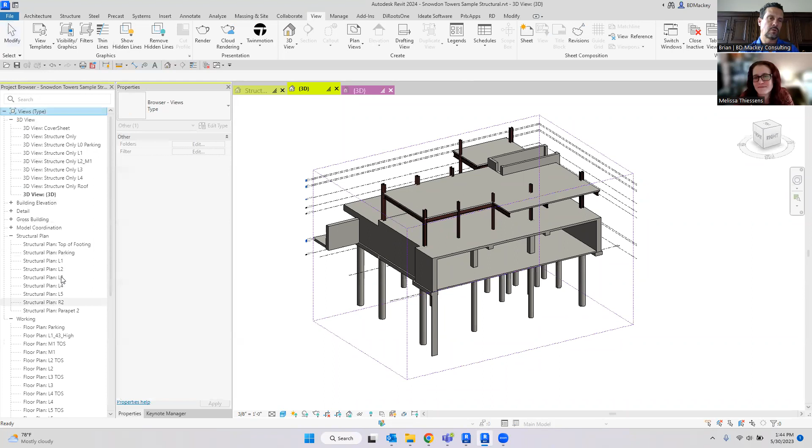Now, as you uncheck certain things, like since I unchecked, I don't remember what floor I did that on. You can't find your parts. I think I was on level 2 when I did that. No, go away sheets, come back views, go back to, I think it was level 2 I did that on. Did I do it right here? Oh, I did it under.

Thanks for the courtesy laugh, Ben.

Did I do it on level 2 or level 3? Does anybody remember where I did it? Show parts. It's got to be this level. Let me go and hide the links. There it is. There's my parts. So when you do the parts, yes, it will update. But since I changed the material of this one, I unchecked the material by original, it will still update. So if they change their wall from a 4-inch stud to a 6-inch stud, my part will then reflect that.

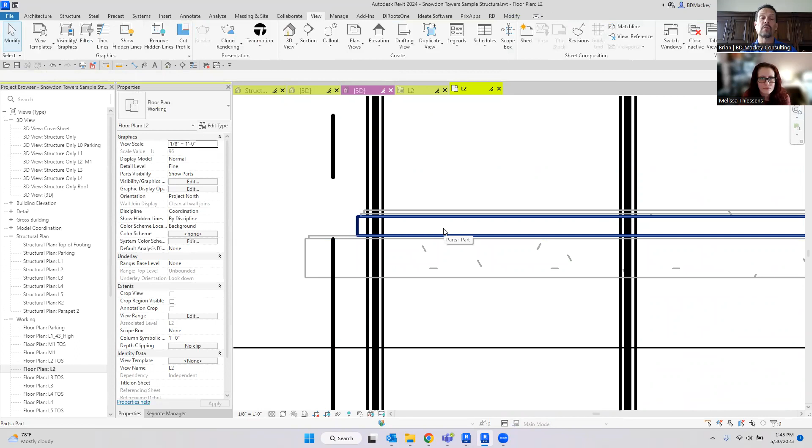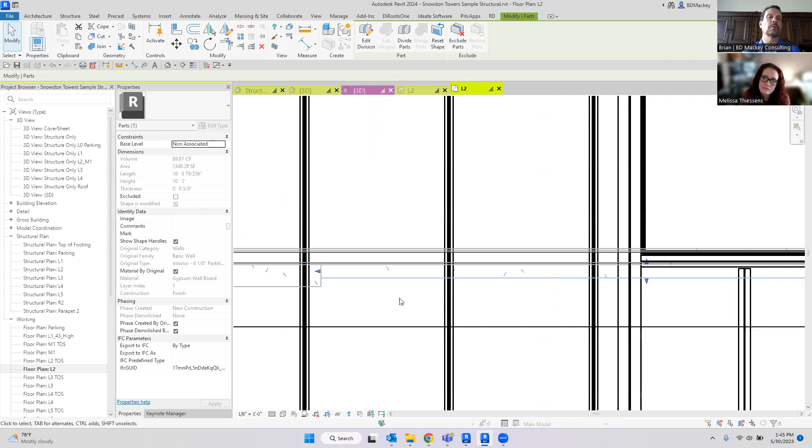And these parts will move depending on how much you've manipulated them. I don't plan on you doing the change the shape handles and move this. I mean, if they move this from like 4-inch stud to 12 inches, and since I showed shape handles on this, I don't know if the back is going to stay stationary to where it was or if they're going to be overlapping now. I can't remember because I don't usually manipulate parts through links that much. Usually for me, I just edit the part, I turn on filter to create the ones that are hidden that I don't want to see, and that's what I do.

But yes, they will update. If their wall type changes from a 4-inch to a 6-inch or to an 8-inch, then this part will adjust accordingly. And as long as I haven't done too much to manipulate those, I believe they'll all move and go along for the ride. So yes, that absolutely will happen.

You still can tag parts. You've just got to go create tags. So I can go tag a part. You've just got to go create a part tag. And guess what? Out of the box, there isn't a part tag. Oh, I guess I lied. Part tag. There you go. So there is a part tag. So you can still go tag that part and do what you want to get to it.

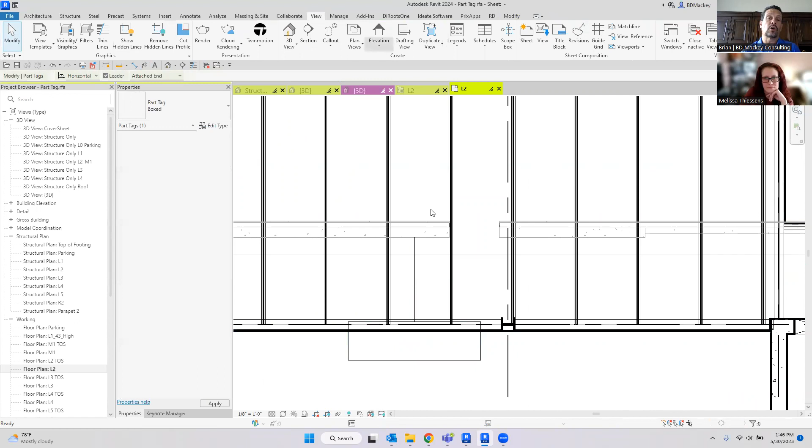Now, with that said, they have different values that you can start tagging. This is why I said, you might go create shared parameters for your parts or whatever that you might be looking for. Because when you start looking at the parts, you're going to get like original category, original family, some of that stuff. You can even get things like, hey, has this shape been modified? So if you're trying to do a QA part to see what's going on, but you don't get all of the properties you would get like for a wall.

Like you might get base level. I don't know, let's add it over and see what it gives us. Base level, do you get top level? I don't think there's like a top level like a wall, because again, your parts could be floors, foundations, columns, walls, ceilings, any of the system layered families and system foundations, etc. So there's a lot of things that you can create parts out of, so you're not going to get all of the properties you might have had in there. So you can start coming in here and doing some of that stuff.

I don't even know what layer index is, but cool, let's go load that into the project and find out. Those exchange, was it exchange identity or? That's all your IFC stuff that they added to 24. Okay. So it's not associated to a level, and whatever the other thing I picked up with the layer index is 1.

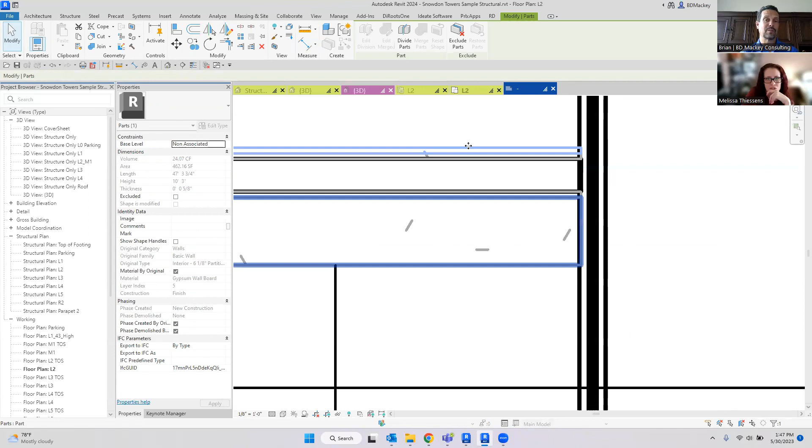Is that like layers in Revit, the wall layers? I have no idea. Yeah, that's layer index 2, layer index 3. So that's your core versus your finish. No, there's just 5 layers in this part. 1, 2, 3, 4, 5. Oh. So just not the core. That's what I thought at first too. So if they took that and changed it to a concrete wall, I would lose all these other layers because theoretically they don't exist. Just go back to core. Okay. Yeah. That is pretty cool.

I really am gonna have to go play with parts more. You gotta add the word "my" in there just because it sounds so much better, Melissa. And then you gotta get like a raised eyebrow when you say, "I'm gonna have to go play with my parts some more."

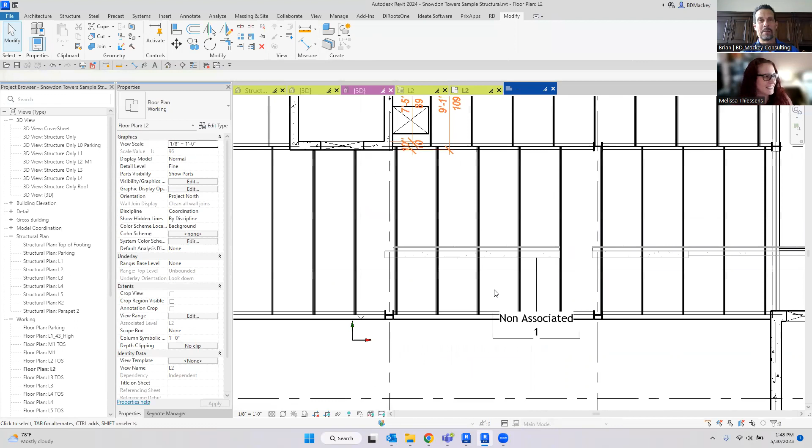Gotta go. Play with my go. Oh wow. I'm just gonna say I'm on lots of allergy pills right now, everybody. Keep it a little more under control. This is why I never used to record these, is then I didn't have to worry. It's true, and then you get me on here with my filter all Benadrylled out.

And yeah, theoretically it all updates. Like I said, Ben, play with it on a project and just kind of see. If it doesn't work, then you delete the parts and you go back and you draw a wall in there. And technically, that's the weird part about this: if you part your own wall out, you still see the original part. But if you come back here and say show original, since the original's in the architect, it goes away. So it's weird when you part through a link because the show original just says, hey, I'm making everything go away, which is really fun to do structural because everybody's like, I can't see my walls.

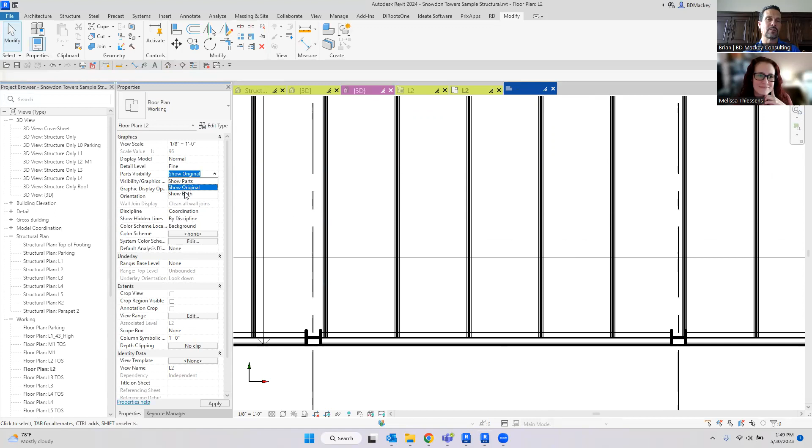Maybe it's the discipline. Maybe I need to go change it to architectural or coordination. What's going on? Why can't I see my walls? Well, it's because they're not walls, they're parts. So if you left it on show both, then you would see your parts as well as your original wall if it was yours. Or you can say show the original. Again, if it was yours, you'd see your own wall or parts, then comes back to just your parts. So yes, if you're doing this, you've got to let the team know because they go to their 3D view, they're like, the whole model just disappeared. What's going on? All my stuff's gone.

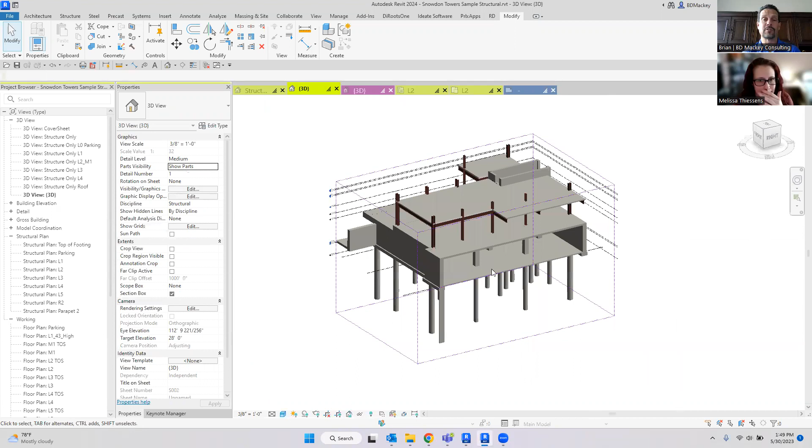Because if you're parting it from an architect's file, again, in here, you'll see that I don't have those walls floating in that rando space in the middle. Actually, I should somewhere say that they are. Because normally when you would come into here, your parts wouldn't be parts. It would be like show original. Everybody like, where'd all my walls go? What's going on there? So again, it's when you go back and say, hey, show me those parts. You get to. What was that? Go back in here and say, show me your parts.

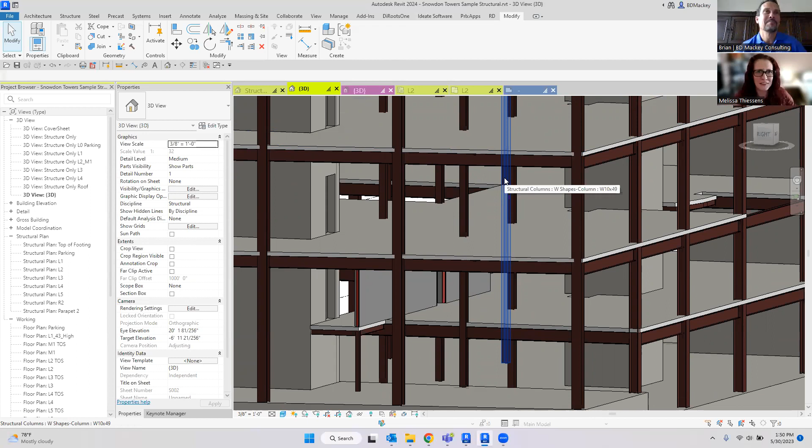Show me your parts. I have to tell them. It's fine. Oh man. I'm also slightly unclear because Ben has the end of that question says, sorry, also you mentioned there were 2 ways you deal with wood. And I'm not sure if it's piling on by inappropriateness or if that was actually a recap of how Ben's asking how I play with my wood part or just my wood. How you deal with wood. Yeah. I'm genuinely not sure if that was funny, I'm having flashbacks to Big Bang Theory when they're playing Catan. I'm gonna erect something with my wood. Sorry. If you've not seen that episode of Big Bang Theory, you need to Google it.

So the other thing I was saying is if I was working with the architect's file, I have seen people, and this is totally not going to be the right object for this, but I'm going to use this one that I have for interiors. Let's say in here, this is where the architect's wall was and I could see their wall. What you can do, and I'm going to go ahead and load in one of my detail component families. Nope, that's not what I wanted. Wrong thing. See, BD Mackey, I got to go to 23 because I haven't uploaded anything yet. Detail items, division 0.

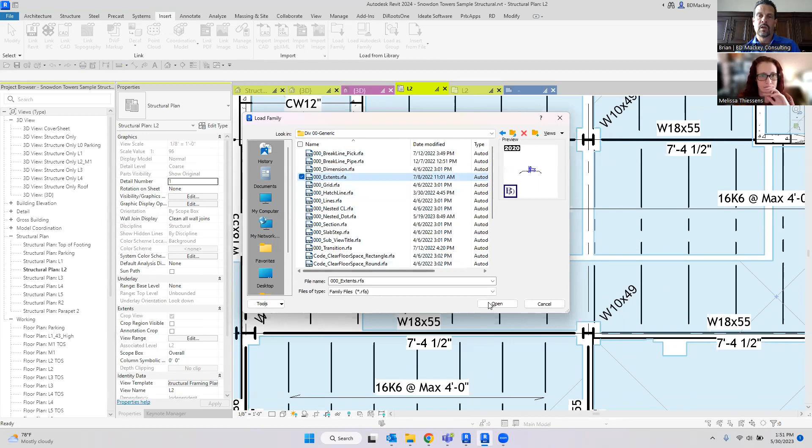So what I've had some people do is basically create something like this, where it says detail component family. And this detail component family is going to be a line-based family. All right, so it's only going to show up in the view you're in. It's only going to show up in the one view. You could do this with a line-based 3D family if you really wanted to as well, and just put symbolic lines in there so you could tag it in multiple views. I just only have this one currently. That's not what I wanted.

So if I go to detail component, it's going to be the one I have in here called paint extents. But then you could just be like, oh, there's the architect's file. I want to draw this from here to here, spacebar to go to the other direction. And this is literally just a 2D detail component family, right? You could then add properties to this detail component family for prefix, suffix, whatever you're going to want to do, and then you could just tag it.

So you're literally just tracing over what the architect did. I went too far, I didn't realize there was a hallway there. Went too far, but you can come in here and it's just this 2D line you're doing, and then you say, hey, this is my shear wall, right? You could have your shear wall tag that you could tag this detail item with. You could have it pre-built into the symbol if you want.

I personally recommend tagging it because then that way you can move it around. But you could have that pre-built in, and it's literally just either a 3D with symbolic line family or a 2D family that you just trace over it. Now, this has no relationship. So if the architect moves the wall, lengthens, shortens the wall, this is not going to update with that.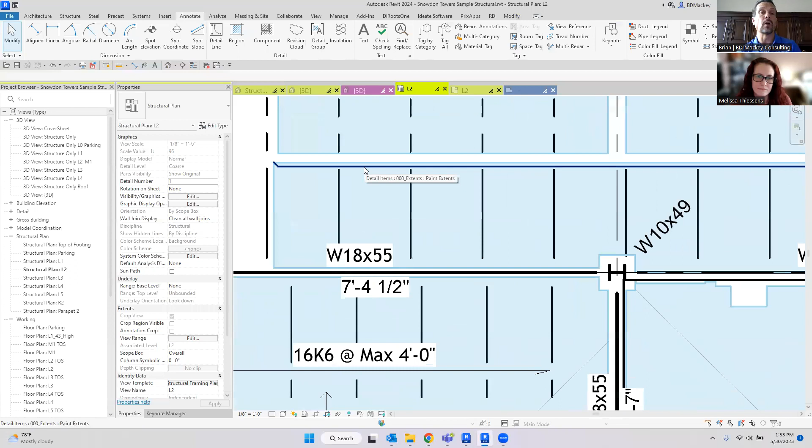Right? I have also created for a client something similar, but it was an adaptive component where we could pick the beginning of that wall, the end of the wall. I also set it up to where that would report the length, and then they used that length value in some sort of engineering calculation that would report back some sort of number they wanted. So it knew the length of the family, which you could do in a detail component too. They used that in some sort of calculation, or maybe they just scheduled that. I don't remember. And then they tagged that adaptive component.

The reason we did that as an adaptive component for them is if the architect moved the wall and you hosted it to the wall, then it would move along as the wall updated as well. So it's a little bit different than the 2D documentation, which is detail or model component. The adaptive component literally can be hosted to the architect's wall.

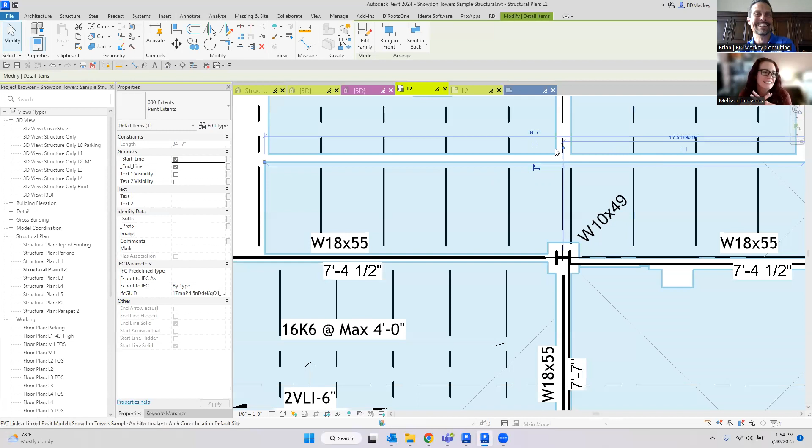I chuckled there because I was going to ask, can you lock it to your parts? If it was adaptive, it would automatically be levitating towards my parts, gravitating towards my parts. Oh man, that was kind of a serious question though. If you had your annotation there, if it would go if you locked it to the part and the part was up. I mean, I don't really know what else they should call that, but man, it's making it difficult to have a totally professional conversation about it. These are my professional conversations, Melissa. I don't know what you're talking about.

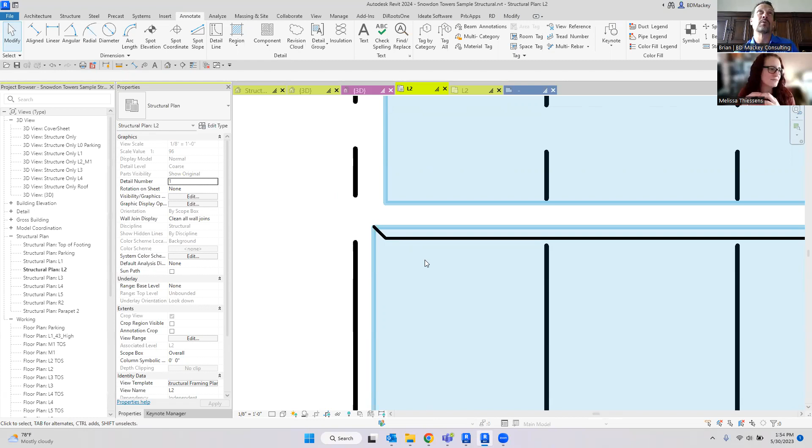No, the whole thing on that is when Autodesk released parts, it was a while ago. It was part of their construction push for Revit, where they're trying to make it for contractors. And their ideal aspect of it was not to use it for something like that. And I still have structural engineers who will use it for something like this. It's like, okay, I'm going to go in and grab my parking level, and I've got this slab, and I want to show construction joints.

I should have went to the actual structural view, not the printing, the working view. But so they've got their slab in here, right? So if we come in here and find our slab, you can take that entire slab. This is our slab here, I think. Yep, my floor, and I can edit, or I can make this into parts. So I'm going to come up here and just create this and convert it to parts. And now I've got the floor as a part.

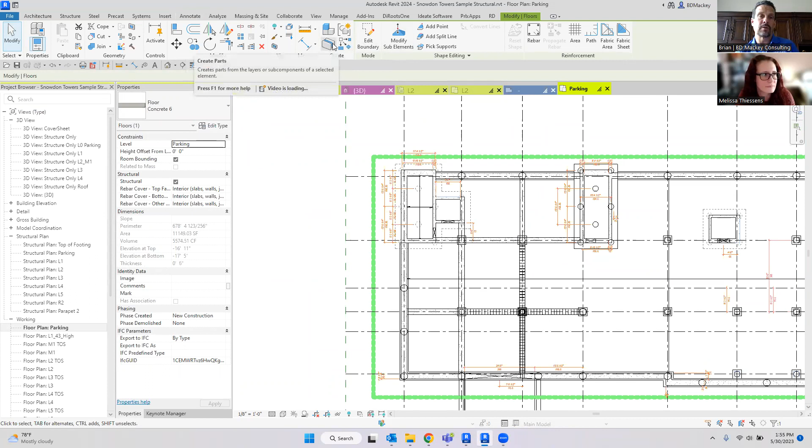Because then you can start coming in and saying, hey, I want to divide the part. And then I'm going to do it by sketches. Or if you wanted to, you could even say, I'm going to do it at intersections. I want to part this out at every single grid level. Check all. Say, okay. And now what I'm going to do here is I have added a construction joint at every single one of those.

So let me go back to my 3D view and isolate it. And you're going to see, hey, here's my floor. Oh, I only had one part selected. But now you can start to see I've got all of these. I just did it to grid lines. You can sketch them in wherever you want them to be. I put all of these in there. Now I can see all of these different floor parts for what's going to be in there.

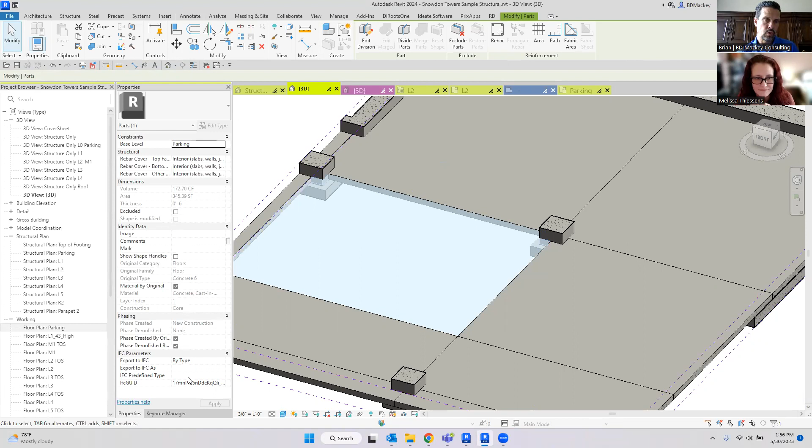The other thing that's fun about this too is if you come down here, do I have to grab the original first? Can't remember where I have to grab this from. Just give me one second. Yeah, I think I have to grab the original piece. Okay, I should be able to get it here. I'm going to come back and say show both.

So this is my floor. Where is it? Oh, that's right. I've got to grab this. I've got to say edit division. And then up here, you can even do a gap. So I wanted this to have a 1 inch. I'm going to do 1 inch gap. I know it's big for construction sequencing and finish, but you'll see even though I only sketched a line, now I've got 1 inch gaps in all of these.

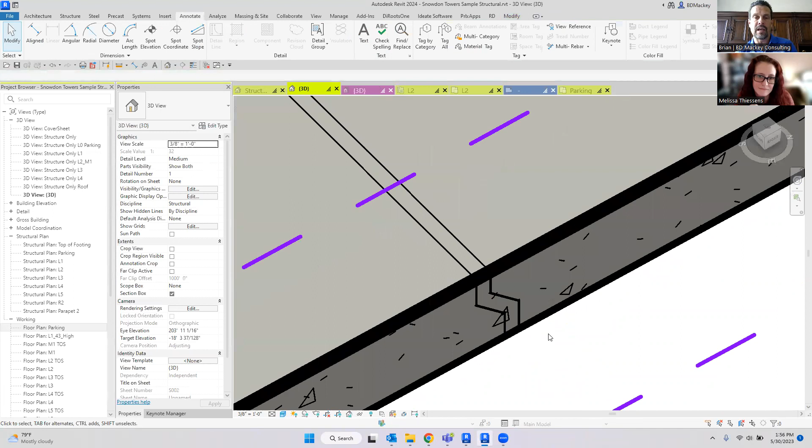So you can go in and have gaps in there, or you can come up here and say, let me go edit that division. I probably have some profiles loaded. Yeah, so I can actually do different division geometry profiles. And so now when I finish that, you'll see that not only is it a gap, but it's also got whatever profile you put in there.

So this is the whole theory with Autodesk. An architect or somebody could go draw a concrete wall, and then the contractors could go start dividing it into parts and show where those precast divisions are going to be. And if you divide that part, it has properties for gapping, profiles, etc., and what you want to do. So that was their whole theory behind it. So look, I now just showed all my construction joints for every single one of those things.

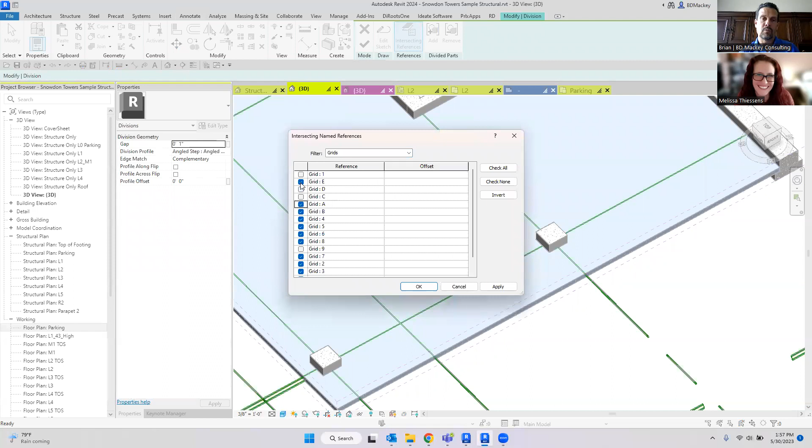And again, then I could come back, but oh shoot, I screwed up. Let me go edit division. Let me grab the intersects, and I didn't want a specific grid line. Probably should have looked at what grid line we were looking at first. We'll just do this and say, really? I can't select more than one at a time. We'll do the arrow spacebar trick. And now you can see I broke up all those divisions, but this one's still here.

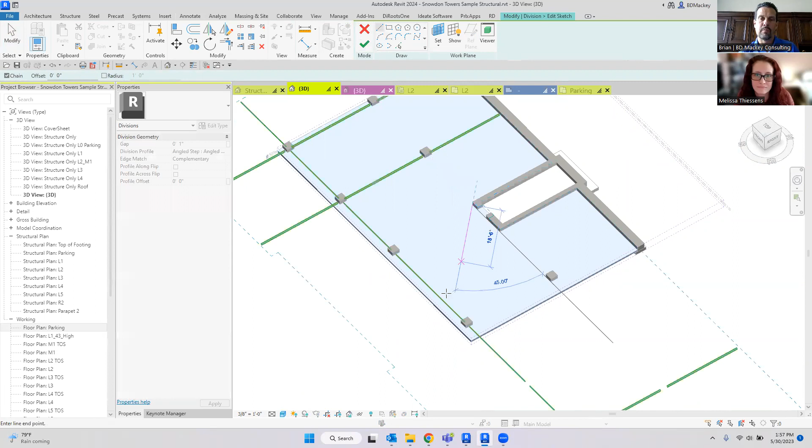And then you can subdivide a division. So if I have that division, I can actually take this one and then edit its division and then edit its sketch. And hey, I wanted to have a concrete joint. Go from this corner over to here, cool, finish. And now I've got that in there, finish, and now I've divided that part. So a lot of different ways to play with that and start getting into it. So yes, that's what originally was there for Autodesk, and that's where we can start taking advantage of it.

Okay, so I'm gonna let that one go. So yes, go home and play with your parts.

Oh, I like that last comment. Somebody deleted it. Somebody just had a comment come with, oh, look, I came in the right time for the conversation.

So when you get into the keynoting, if they're trying to open up your file and see the keynotes, then yes, they need the keynote file. If you're just giving it to the structural engineer or the MEP engineer or whatever like that, then no, they don't care about your keynotes. They don't need your keynotes. The keynote value will be there. The number associated to it will be there. They just won't be able to read what that number is.

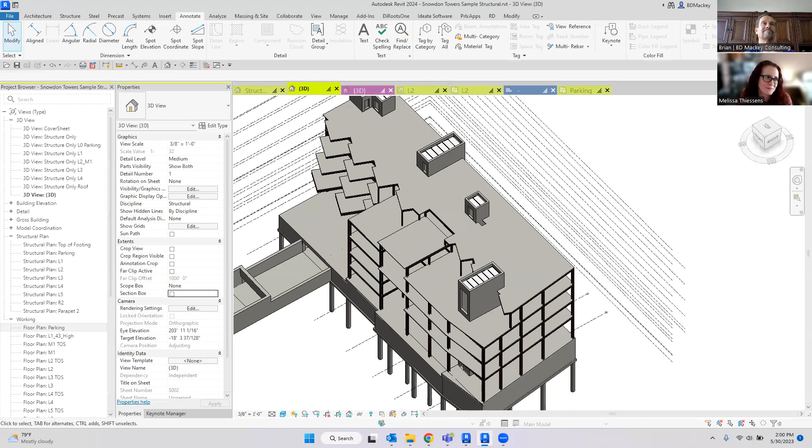And you'll need to keep sending it to them to make sure they keep getting the latest updated keynote file. Desktop connector. Sorry. Yeah, dude, don't rely on desktop connector if you're editing your Keynote file a lot, because it doesn't keep up with that and it goes poorly. And Rick is asking if they want to see the Keynote legend that is on the sheet, do they need the file. If they want to see it within Revit, yes.

All the elements will still have the Keynote properties associated to it, but then yes, they would still need it.

Okay, and quickly, Tom was asking how often you audit your files. All the friggin' time. Every time I open, because I'm always getting in to fix things. So for me, whenever I open up a client's file, I open it with an audit pretty much every single time. If it's my own file, whenever I think about it, which is probably about every third or fourth time I open up the file.

I've got to remember to not use the recents, right? We're all in here, we're all working. I got to remember to not open it here. But if I am browsing to the file, if I'm going through docs or open or whatever, absolutely I freaking hit the audit every single time. So that's the way I go through and do it. I audit all the time.

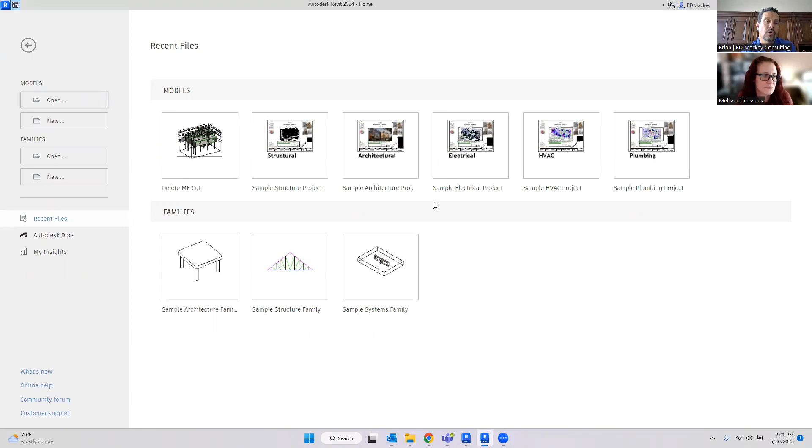The other thing that I do quite often, I don't know if you do this, Melissa, is during my synchronizations on a large project, I don't have a BIM 360 project open, but during my synchronization, I check the compact central file. Yeah, do that too. So those two things, the audit will take you longer to open the file. The compact will take it longer to synchronize as well. But I always tell people, if your role is model manager in the office, you should always do both of those things. If you're the BIM manager, you absolutely should. But that's just kind of how I word it.

The other thing is, if it's a BIM 360 project, I tell all my clients that you should have somebody publish every single day, because why not? It takes you 30 seconds. So if you're the person publishing, you might as well open with an audit, because you're already browsing to the file anyway. It's true.

Have you ever actually seen it take longer? It always gives you the pop-up that it'll take longer, but the only time I've actually seen it take much longer was when there was a problem with the file. It's hard for me to say, because usually it's a BIM 360 project of the clients I haven't opened in a long time, but it does take a little bit more time. Yes, they say significant. I don't think it's significant, but it does take longer.

Sarah's wondering how the audit works when there's others in the model. So the audit goes through, and it's just like anything else. It's auditing every single thing, theoretically every single thing in the file. And if it finds something wrong with it, it fixes it if it can, and it will tell you I found something. 90% of the time, it doesn't actually tell you. It's like, hey, it just opened. You're like, cool. Did it do anything? I've actually had it fix bugs, because I've had Autodesk tell me, oh, it looks like you ran an audit on this day and it fixed it. Cool.

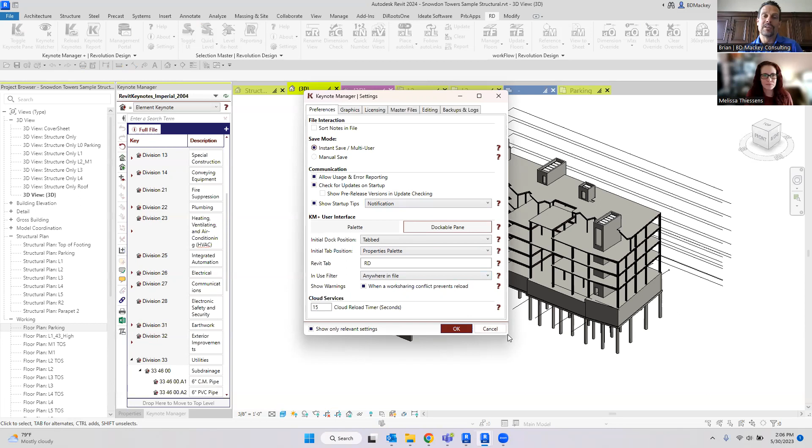Plus, I always give Steve a great shout out because he lets you rename the Revit tab. So I don't need the big long word called Revolution Design up here, which is the default. Nice. You can rename it to anything you want. So you can rename this Keynote tool or whatever and get it all nice and short, so you don't have long tabs up here if you've got too many like I do. Yeah.

Oh, yes, the comment now is sometimes wonder when you're already paying for the Autodesk Cloud. Yes, it's true. And I don't know the pricing on the cloud stuff now. I know it had to go up, but originally it was literally like $80 a year because he was just paying for the hosting itself and passing that on. So yes, it does kind of suck buying all these extra things, but it saves you so much headache that it ends up being kind of worth it.